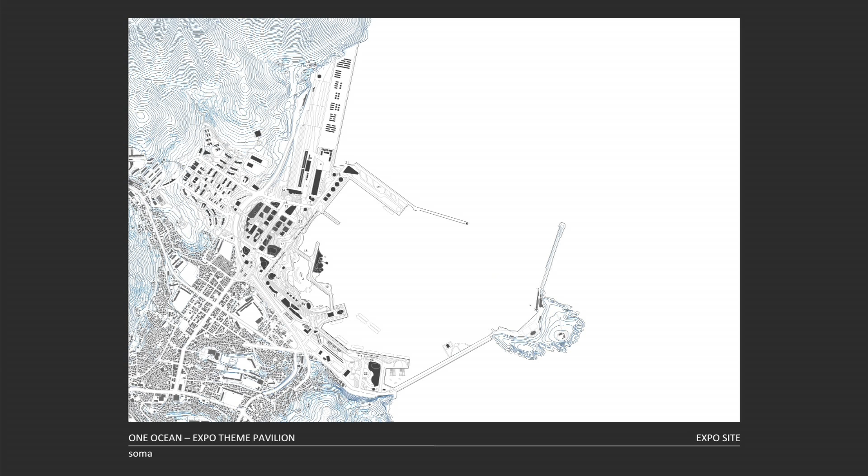And then, of course, to us it seemed to be very crucial to work with this ocean coast here that was overwritten already by the industrial port and that now was in the process of being overwritten again by the Expo. For us, really interesting that in the end the building gets indeed a hybrid between landscape and building when you look in Google Earth and you can't really tell what's the building and what's the topography.

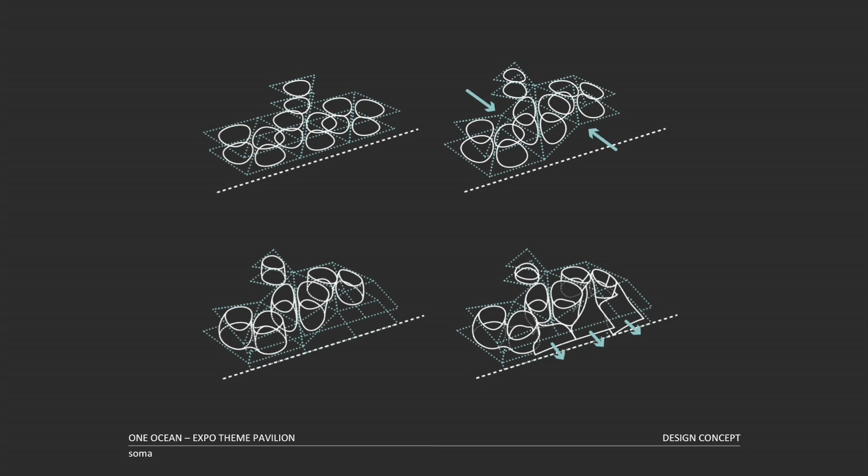So as mentioned before, dealing with the coastline was the main concept for the building. So the idea was to take the exhibition spaces, at that time there were 6 sub-themes of the Expo, and aggregate them along the industrial coast. And then by transforming it in an interdependent grid, create public zones for the foyer and extend the promenade into the building. So this is this view, the aggregated exhibition cones along the seaside.

And the choice of material was also due to the constraints of the site. Since it's built into open water, we had to protect the building from the impact of ocean waves. And so this is where this compactness comes from. And then as a counter pole to this, we had this idea of opening it up again with these triangular patterns. Also to enable an after use, since, as you might have recognized now, this is a permanent building. Nobody builds a temporary Expo pavilion out of concrete, I hope.

So as mentioned before, these different appearances, so what's compact and solid towards the sea opens up towards the Expo site, and here the building shows this more fragile kinetic facade towards the entrance of the Expo and the background. And when you deal with these different faces, of course, it's a question how to merge them. So here you see how these concrete cones twist into the aluminium facade, and then the GFRP plates.

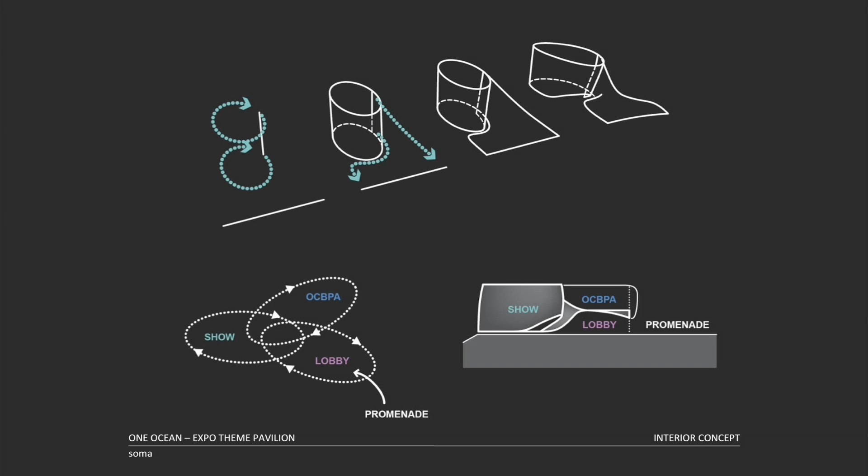So this idea of the twisting cones was also a very initial concept during competition. It had also to do with the idea of how you experience the ocean, so that you would immerse into the bottomless pit. So the theme exhibitions would all be in these vertical spaces you would literally immerse into, and then on the other side you would also experience it as this horizontal surface. So the other so-called best practice area exhibition would take place on this horizontal platform. And the cones would do this in one movement, thereby creating, defining and dividing all major spaces in the building.

Just what we regularly do in the office: we work digitally of course, but we like to build and prove our ideas in models very quickly. And then just to show again the idea, extending the promenade into the building, creating a shaded space for queuing people. Of course you can't have enough shaded space at Expos, the queues were longer than that.

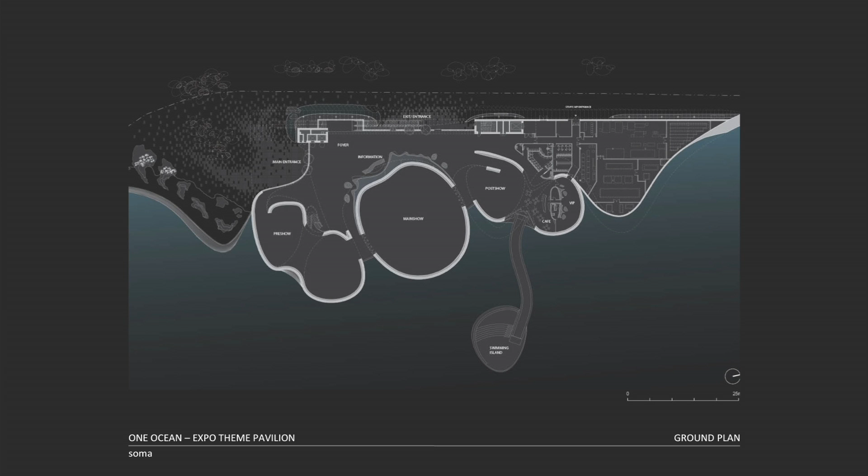Then the big open foyer, and then you enter into the cones, pre-show, main show and post-show, and then you go up to the best practice area level. So here you see how people were entering and exiting these spaces between those curved walls and diving into these vertical vessels. The foyer open space to contain crowds of people.

And in section you see again the idea of the cones that then turn into this kinetic facade and into the roof, and in section the sequence of the spaces. Quite a challenge for the structural engineer was this main cone. Originally in the competition we had these 6 sub-themes, the 6 smaller cones. Later on during the planning we had to insert this main cone to react to the ideas of the exhibition planner. 30 meters in diameter, 20 meters in height. So this was really a big challenge.

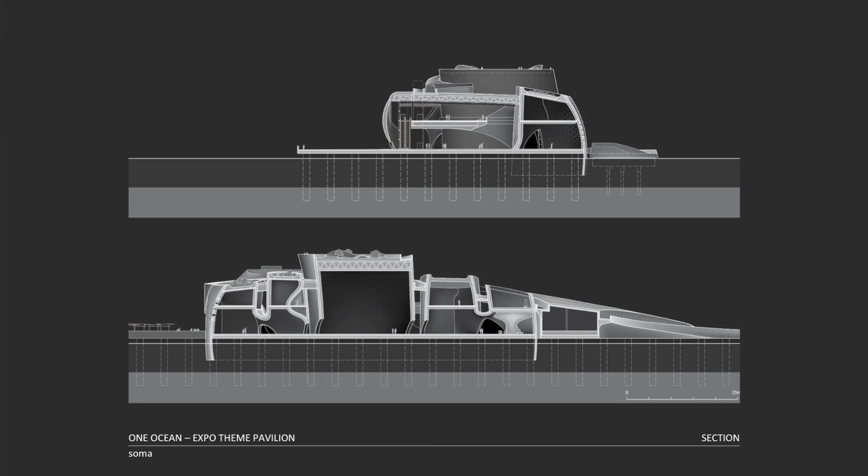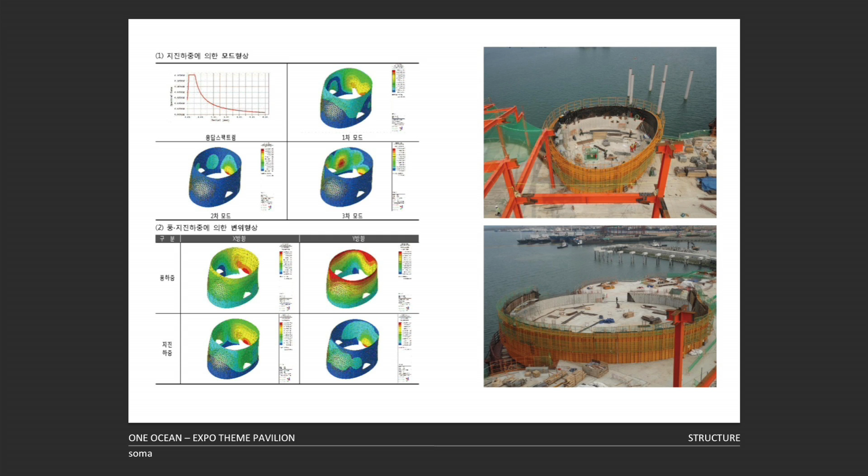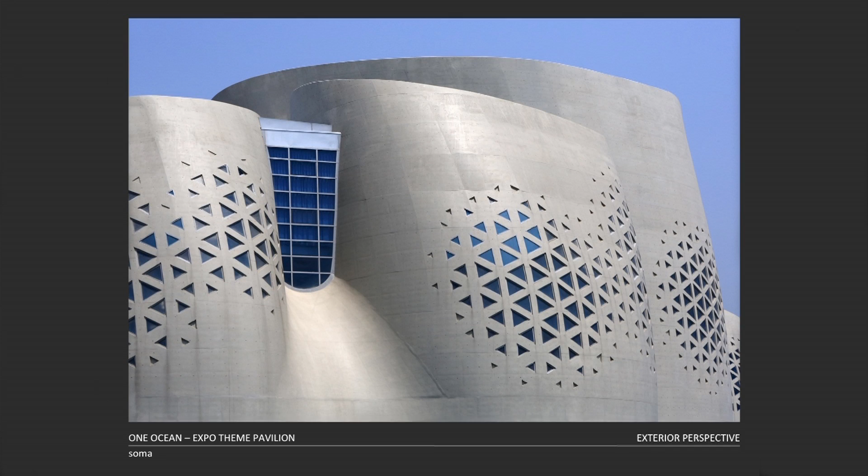So again, parametric modeling is our everyday business. Finding out how many sizes of these triangulated windows we would need to create these patterns with a gradient, and then of course, because we wanted to reduce them, and then here the windows were all closed during Expo, because they're mainly for the after-use of the building. The only windows that were open were in the cafeteria.

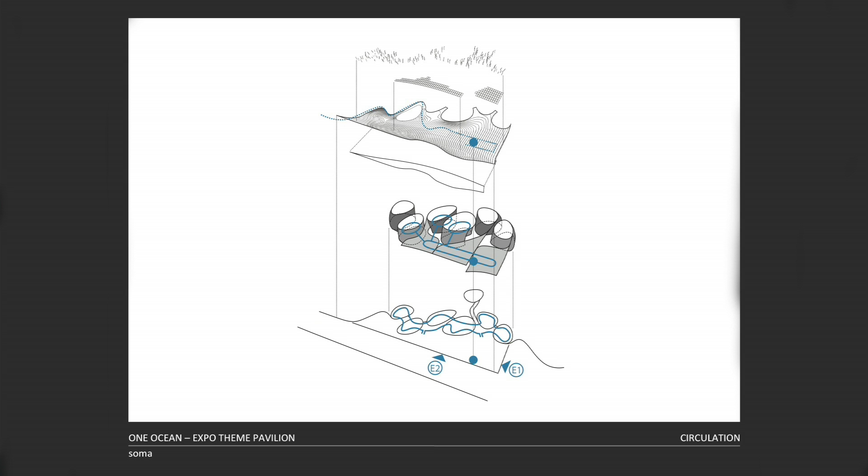What we added to the brief was the idea of a third exhibition zone, a freely accessible open roof garden that everybody could access, and where there would be no queuing lines. So you walk up on this meandering path through and in between the cones, and the cones frame the view onto the surroundings and the ocean.

And this actually became a very popular space during afternoon hours, and also in the evening it was an amazing spot to look down at all the shows taking place at the Expo site. So we were happy to see people up there doing their picnics and relaxing.

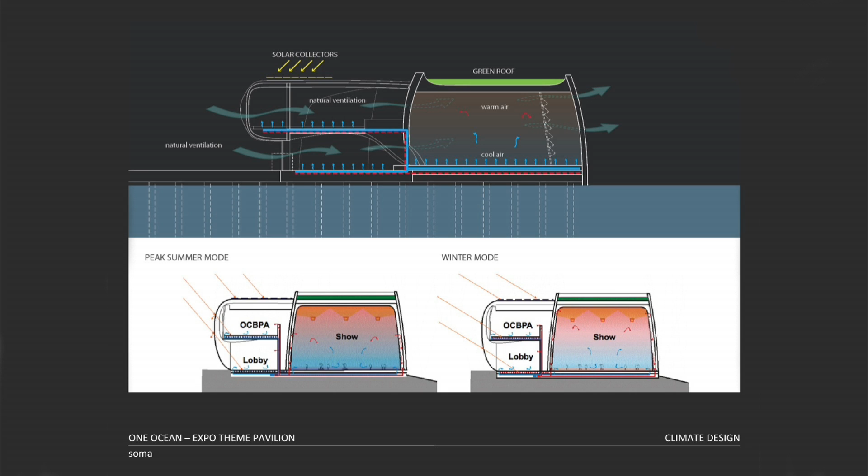Also a really crucial point already during competition was the climate concept. We were working on this together with Transsolar, also a very impressive consultant from Stuttgart. So the idea was really how to create a synergy between the building's geometry, the construction method, and the ideas for conditioning. So the idea was to create natural ventilation between the cones, and also a thermal stratification of the air, so that you would only condition areas where people are really moving along, while other areas that are very high up can be hot anyway.

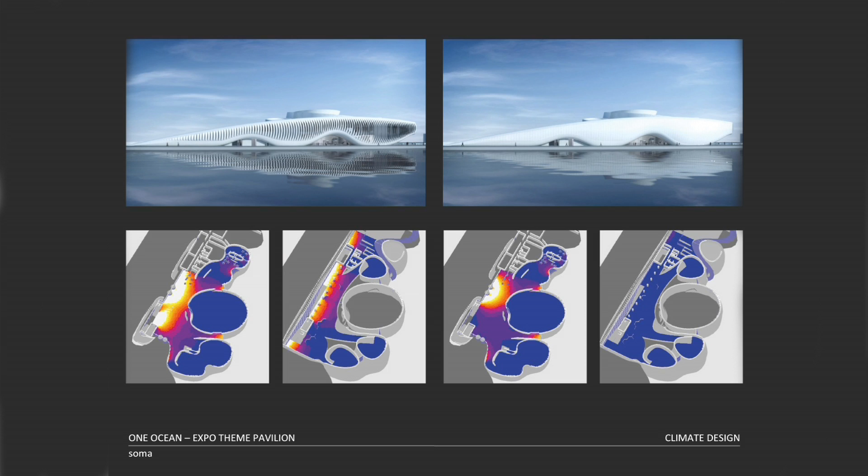The kinetic facade, of course, is an integral part of this climate concept. In its basic operation mode, it's providing shade and controlling solar input. But to us, it was clear at a very early stage that we had the opportunity to create a completely new kind of media facade. Actually, the building is now in the new book by Häusler, Media Architecture, Media Facades, and we're the only building that

we don't use LEDs, but we use the architecture itself. So the architectural layers themselves create the choreography and the movement. So the idea was that this would be a different kind of media facade. Of course we also have LEDs, because later on the client developed that wish. So there were both ways. It was also working as a conventional media facade, but nevertheless it was also operating during the day.

After competition, still in shock that we have to build it now, we went to Stuttgart because we knew that we now really have to team up with the best. So we went to Knippers Helbig, who have very impressive experience in kinematics, but also Professor Knippers is doing this amazing research in GFRP, and you're going to see, I think tomorrow or the day after, lots of papers from this really incredible research group.

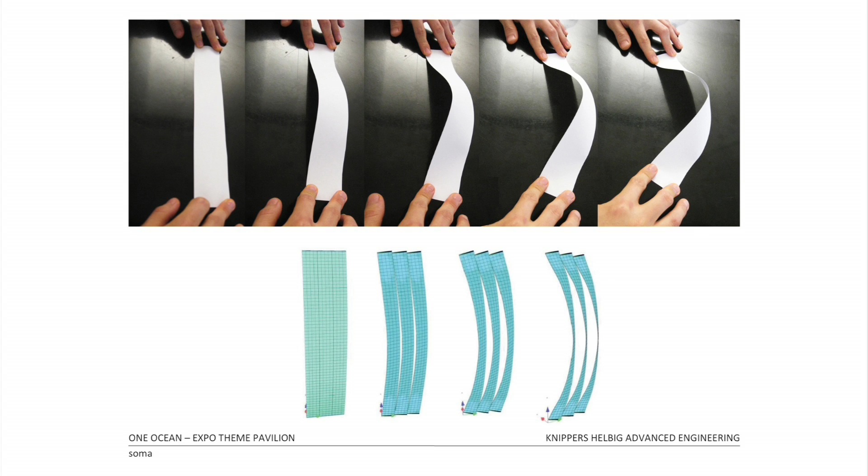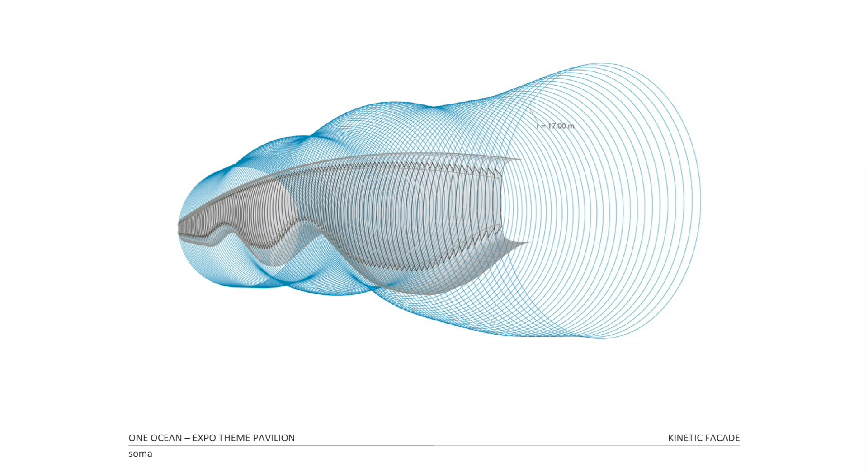You hold a strip of paper by 4 points, and by reducing the distance between two of them, the paper bends. So bending or torsional buckling is something that you usually want to prevent in architecture, and here we use it as a functional principle of the facade. So actually the blade itself is very thin. It's only 9 millimeters. It has a constant radius. It's all 17 meters, and it's just different in length, and of course in the build-up of the individual lamella.

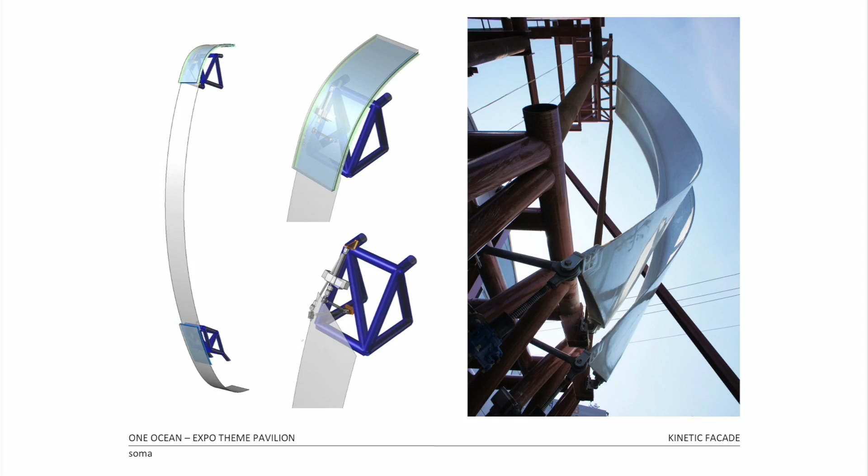So here you see the lamella, you see the actuators on top and bottom that push the lamella, and on the right hand side you see the mock-up with the opened lamella. So you also see that the cross-section is L-shaped, so you have a stiffener on one side, that's also why it behaves differently. The movement really comes out of the material behavior of the GFRP. So here you see the cross-sections of the lamella. Of course here there's the highest opening angle. A very beautiful continuous movement, as we think at least.

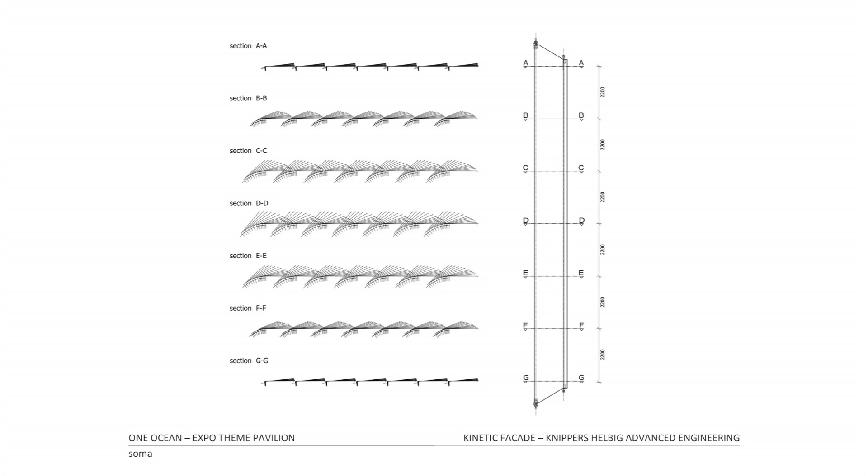And the other idea was also that we would implement light into the lamella, linear lights on the inside, and that they would then create this embedded light effect. So to say, it would create really a synergy between geometry, light, and the material behavior of the facade.

So, to give you some insights into fabrication, I hope. Sorry. Yeah.

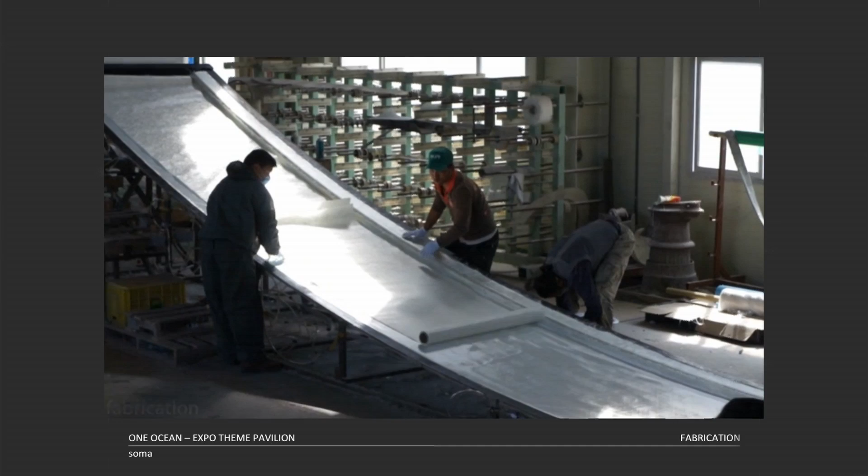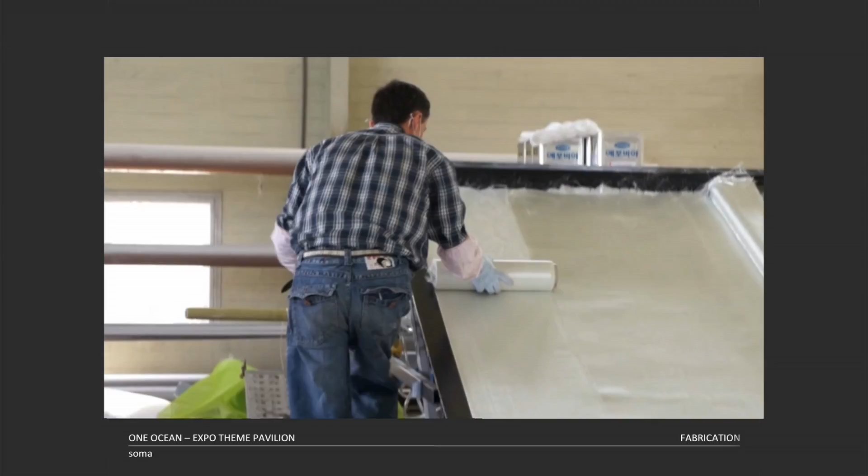So, actually, although this seems to be a high-tech product, it is not at all. I think what's new is the new approach to it, the research, and the thinking, but the technology itself is rather old and known. And actually, it's a very simple, hands-on fabrication process going on here, as you can see. So it's these mats that are laid out and then combined with this resin, and it was produced near Seoul by a firm called Ocho.

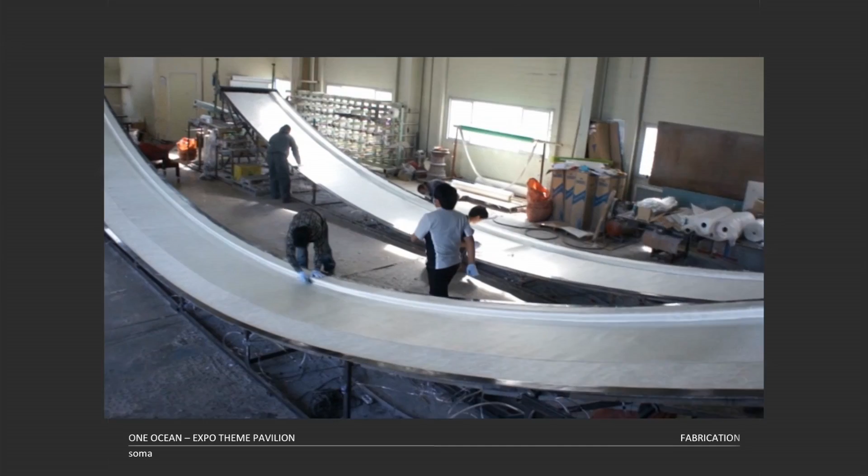And everything, as I mentioned before, had to take place at the same time. So they also built 3 of these negative forms. I mean, 1 would have been enough, but they had to speed up fabrication. And then while they were doing this on the outside, they were starting to test the lamellas in this prototype mock-up phase and also dealing with the programming. So all lamellas are fabricated in these molds and then cut, and here you see the mock-up outside of the production hall. We've been testing 2 lamellas, the shortest and the longest ones, mainly to see the durability, especially of the parts where it is connected to the actuators.

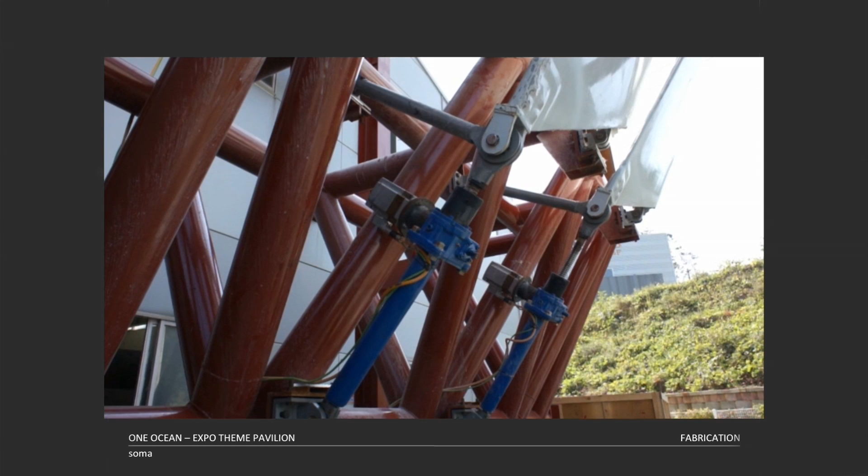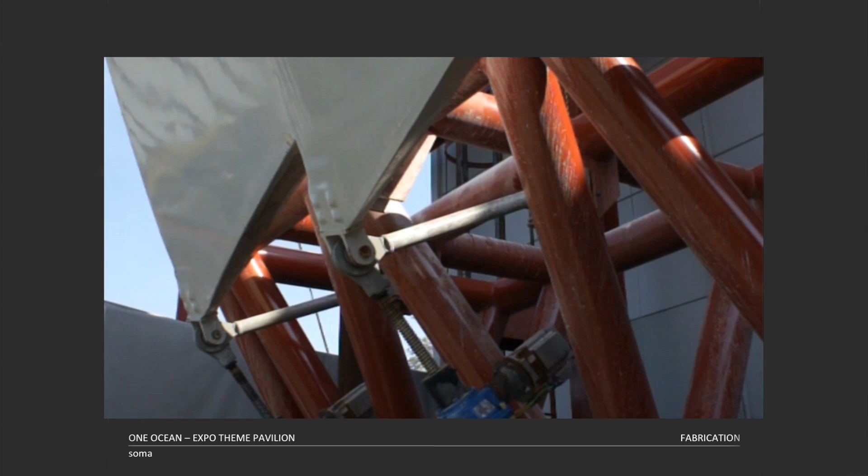And actually, here you can see it moving now. So it's a spindle connected to a servo motor, and these very tiny movements result in this very big opening of the lamella. So actually, it's a very efficient way of moving. There are few joints compared to mechanical solutions that would have many joints that are also many sources for failure. In this case, it's a very elegant solution, also very lightweight, of course. There were some issues with resonance, but they could be solved during the mock-up phase. So that was the fabrication.

And then finally the opening, the operation, so to say, at the site. So each lamella can be individually operated. In this case, it's an opening to one side, but you could do all kinds of choreography. So the idea is really that the layers of the architecture itself become this 3-dimensional spatial experience, and you could also play with the lights of the interior spaces. And here, from further away, you see the effect of the opening and the closing again of the facade.

So, as I believe, the effect without knowing the cause is probably one of the strongest experiences still. And it was really beautiful to see that the visitors were standing in front of these 15-meter-long lamellas that were seamlessly opening, and they were applauding because they just didn't know how that worked, because there's no construction behind, and you could not tell from watching how it would work.

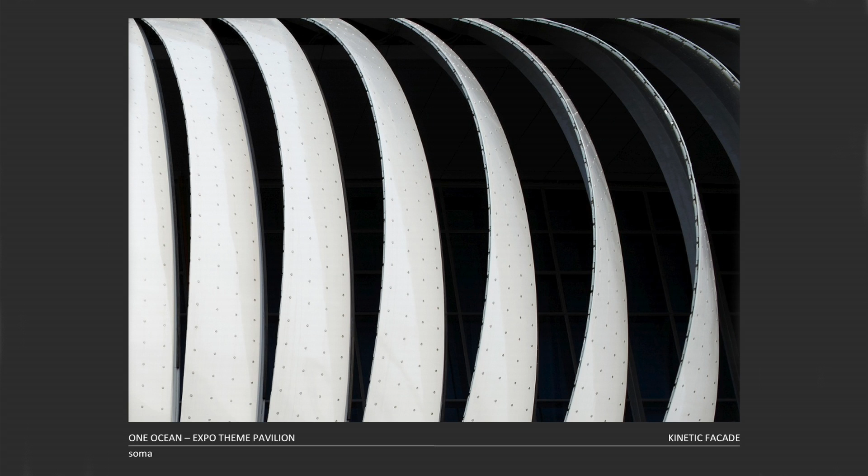So, close-up of the lamellas. Now it's there, the eyes closed, so to say, and it's waiting for a new owner, and then for a new use, and hopefully for somebody who likes to play with it.